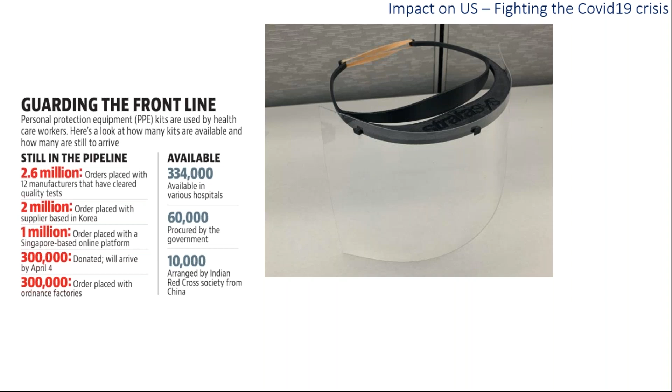Today, I think more than 200,000 such face shields are distributed across India, and the number in the world is almost uncountable. It's in the region of millions.

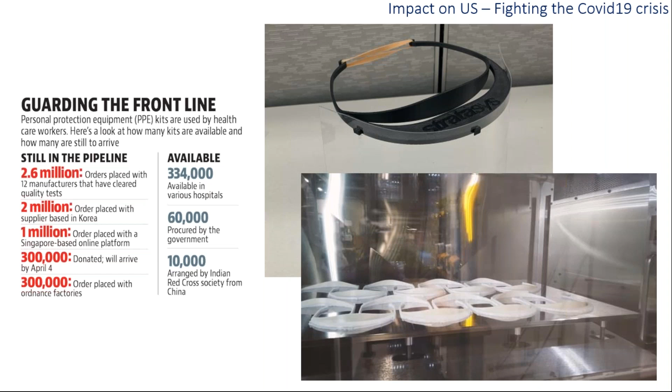The benefit that an industrial 3D printing technology brings to the table is reliability. Although we designed these parts so that even less industrial or less reliable 3D printers can produce fairly decent work, we were able to scale up to these quantities because the machines we predominantly use in the Stratasys network are robust and reliable.

It didn't take too much time for India to catch up. A lot of universities, colleges, companies, and people in general who have printers in India started producing everything from face shields to reusable masks. This is happening all across the country, northwest, southeast, where a lot of our customers, even the traditionally automotive and aerospace customers, have paused their automotive and aerospace activities and started helping the community produce masks, face shields, or ventilator splitters.

We took it a step ahead because we understood that even hundreds and thousands of 3D printers across the world will always have the challenge of only being able to produce a certain quantity of parts per day, and the cost per part is something we cannot reduce beyond a particular point. So we adapt, because we eventually need injection molding companies to give themselves time to prepare for injection molding so these can be produced in the millions of quantities needed.

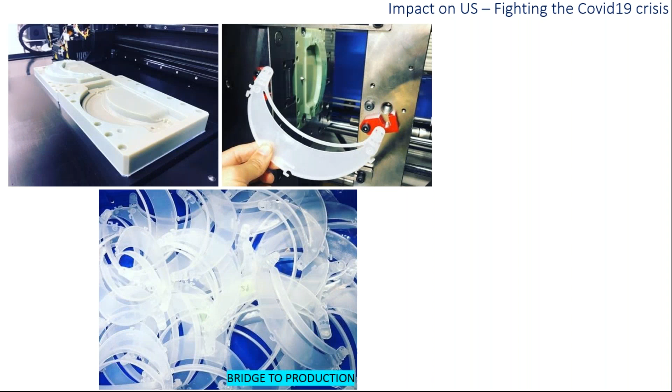We found that intermediate steps, like instead of producing the part with the printer, we can produce intermediate injection molding tools using some of our technology. Yes, these tools cannot produce the lakhs of parts that conventional metal injection molding tools can, but a few thousand numbers per day in a different manufacturing approach can be produced. So rather than having to produce 1,000 face shields, we started producing a few molds, and a few molds started giving us a few thousand face shields in a much more time and cost effective manner.

This is a concept that the industry, especially in automotive and aerospace, and to some extent in the medical world, has been using, called bridge to production. This is a stage between your rapid prototyping or very low manufacturing and mass manufacturing, where you bridge that number between a thousand to ten thousand, or a hundred to a thousand, depending upon the scale of the object, while you get your manufacturing setups or logistics ready.

Setups ready to produce your final parts in the quantities that you desire, and set up the supply chain to deliver it in the areas as quickly and as efficiently as possible.

Another thing that we realized is that countries in the world are and will continue to face a shortage of testing kits, the actual kits which determine whether a person is positive for coronavirus or not, because the manufacturing of this kit is controlled by a few major suppliers. Fortunately, those suppliers have opened up their design and manufacturing know-how to many people in the world.

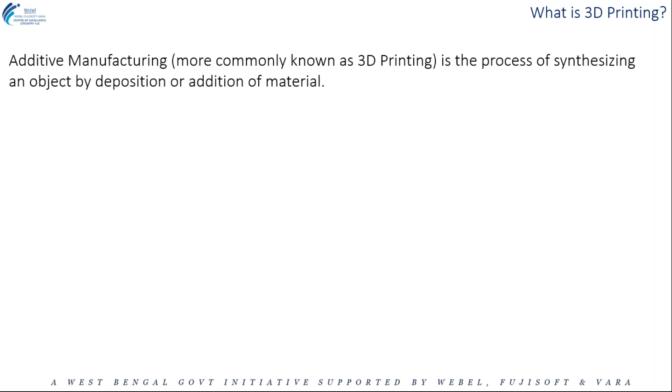The process works with your CAD file. You might have access to any design software in the world—it doesn't matter. 3D printing is one of the only processes in the world which just requires a CAD file and no other specialized tools or software. So you start with your CAD file, it could be anything.

What the printer software essentially does is split the CAD into a number of layers or cross sections. Imagine a piece of paper as a 2D layer or cross section—you stack a hundred or a thousand of them together and it becomes a 3D object. Once this is done, these layers are nothing but information telling the printer how to lay or deposit material on top of each other. That's essentially how 3D printing works.

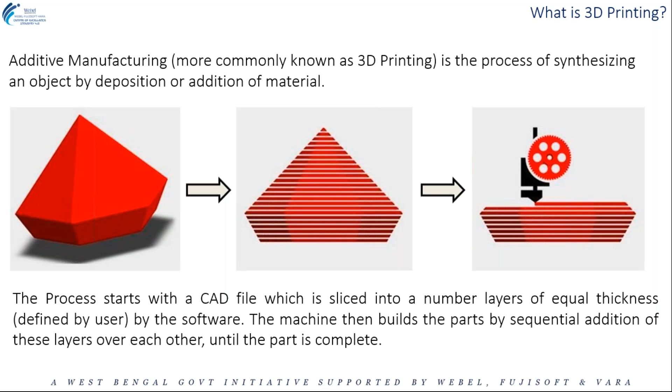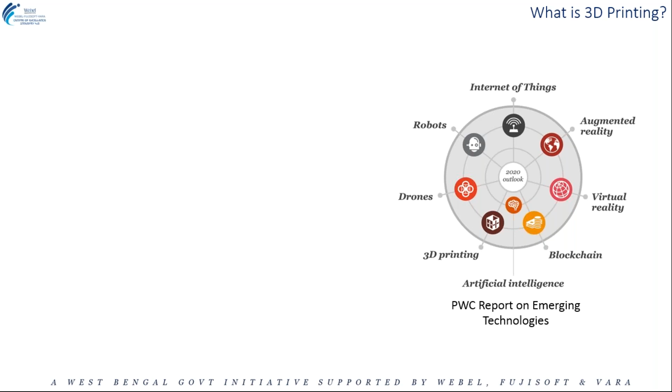I'm sure all of you have seen various videos on the internet and read articles defining the process. Now, the most beneficial thing about 3D printing is that it has proven to have the potential to act as a backbone to various other Industry 4.0 emerging technologies—whether robotics, drones, smart factories, or smart medical devices. 3D printing has proven to act as a backbone to most of these technologies.

One of the very fascinating things I like about 3D printing, which keeps me driven to work in this industry, is that it gives access to manufacturing to people who don't have the know-how, skill, or capacity to use traditional, even low volume, manufacturing processes. For example, I am an electrical engineering graduate by qualification.

For me, it is as easy to produce a part using a 3D printer for anything—let's say a robot or a drone that I'm building—as it is for a core mechanical engineering professional. So that's what this technology does: it makes manufacturing easy enough for anybody and everybody to adopt.

While for large corporations—the Marutis, the Hondas, the NASAs of the world—this may not be much of a benefit, for a small startup group of college friends who want to develop drones, or people primarily from software or electrical backgrounds with very limited manufacturing know-how, it is a very easy tool to validate their designs and products, giving them the luxury to fail a few times in order to perfect their products.

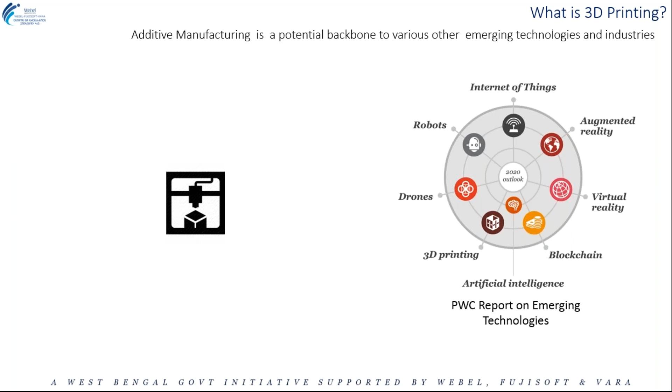Whether it be IoT and smart device manufacturers, smart factories, or drones, which is one of the most used applications of 3D printing both in industry and in education, drones can be mission specific yet generic enough. You build modular drones so you can use the same frame again and again, but keep changing the payload as per your requirement.

Medical devices, some amazing work has been done there, which I'll show you in some time. And of course, with respect to our more conventional industries like automotive and aerospace, which have been the early beneficiaries of 3D printing. I think, if I would relate correctly...

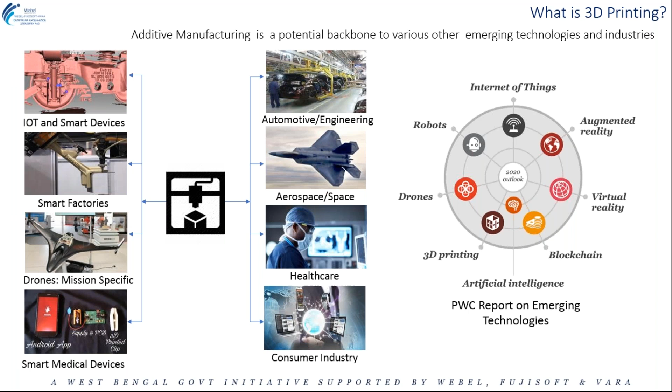The whole concept of bringing 3D printing was around the traditional industries of aerospace and automotive, because at the time the technology started, these were the only people able to afford it. But today, 3D printers and access to 3D printers have become much cheaper and more affordable. What we are seeing is that the healthcare, consumer goods, and small scale industries are taking over in terms of rate of growth as compared to the automotive and aerospace customers. Now, the industry is moving to 3D printing because of a few reasons.

What we feel is the most important reason why customers are moving to 3D printing, as I explained in the whole COVID-19 crisis, is that it gives freedom to people who are distributed, let's say companies working in America with facilities and branches in India.

Abhishek, something with your audio? Sorry, I think my connection dropped in the middle. I'm just going to restart quickly.

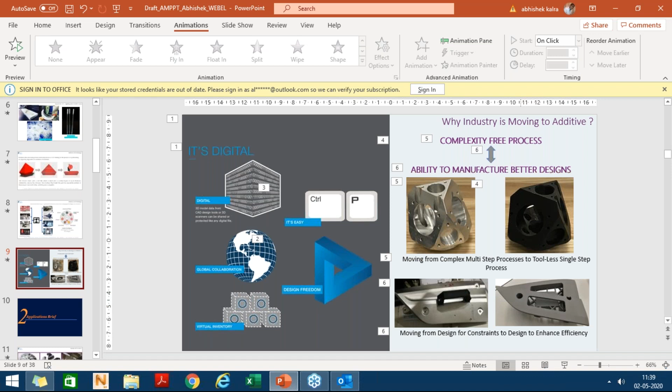Rather than storing, especially the older spare parts which may or may not be required in the future, we go to the concept of digital inventory. And most importantly, it gives design freedom, freedom to experiment with various designs, and freedom to explore designs and benefits and applications which have never been possible with traditional manufacturing.

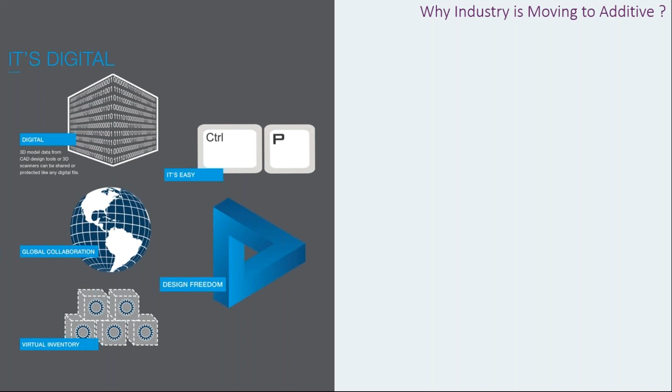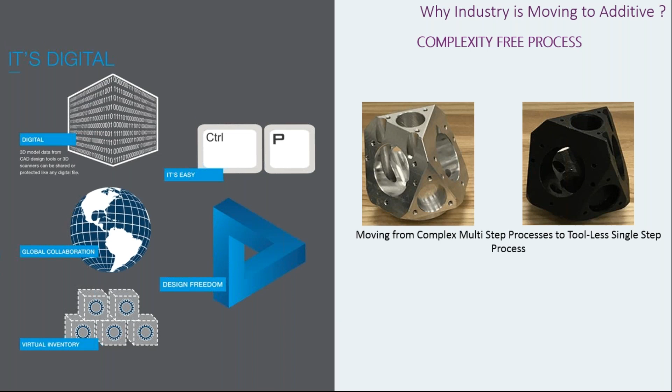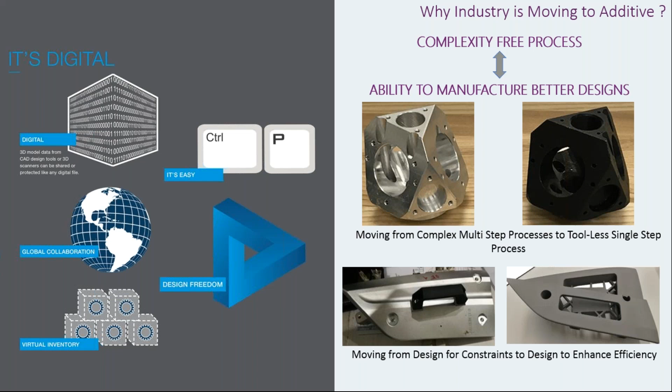Advantages of this: you can move from a complex, multi-step, multi-material, multi-tool process to a single-step, virtually tool-less process. And you can move from design for constraints, as you see in the left image, where you have to design parts so they can be manufactured using certain available manufacturing technologies, versus design for efficiency. This brings a lot of advantage to both traditional industries like automotive and aerospace, as well as to startups who will have very limited know-how of the manufacturing process.

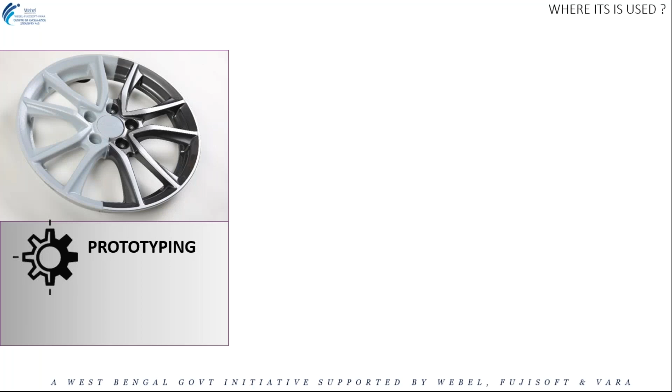If I have to split the application brief with respect to 3D printing, broadly the application can be classified into three categories. First is prototyping. Prototyping is essentially when you want to mass manufacture something - it could be a watch, a cell phone, or a car - with various systems integrating into each other, and you want to test your designs. So you build prototypes very quickly and cost effectively using 3D printing.

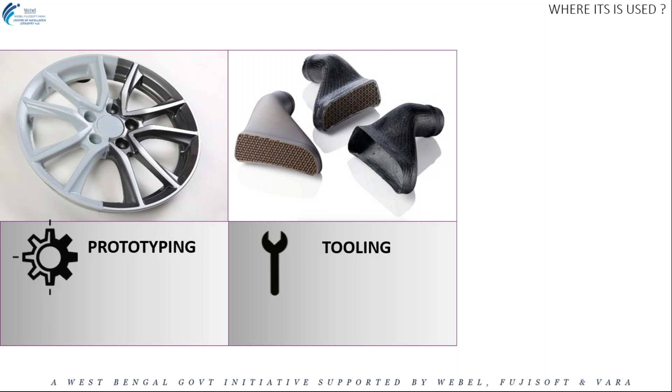Second is tooling. The example I gave you - rather than producing face shields, you produce injection mold tools and use those tools to produce face shields - is an example of tooling. And of course, manufacturing or end-use parts.

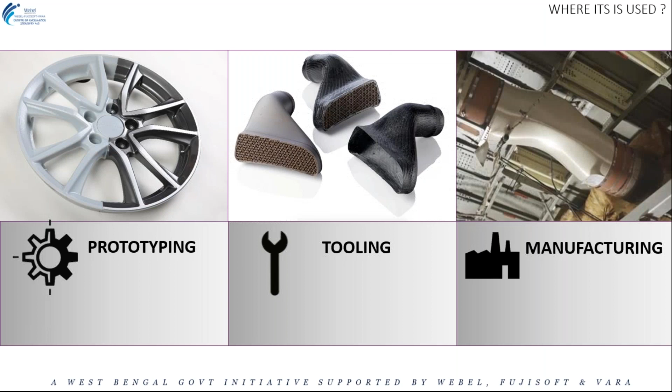Now, if I have to talk about the split, which is consistently changing, I think 50 to 70% of the work happening in the world today is around prototyping. The reason being that 3D printing is not a high volume game, it's a high value game. Though we are continuously enhancing and developing our technologies to compete with some traditional mass manufacturing technologies, we have some time to go until we achieve equivalent cost and time per part.

Next, we have tooling, which is roughly 10 to 20%, and manufacturing is probably less than 10%, which is still a big number if you look at it - manufacturing is a $13 trillion industry. What's happening and what we're seeing is that the trend of people buying and using 3D printers is consistently shifting from prototyping to tooling to manufacturing. In the next 5 years, we are going to see this percentage almost come to a 50-50 between prototyping and tooling and manufacturing combined.

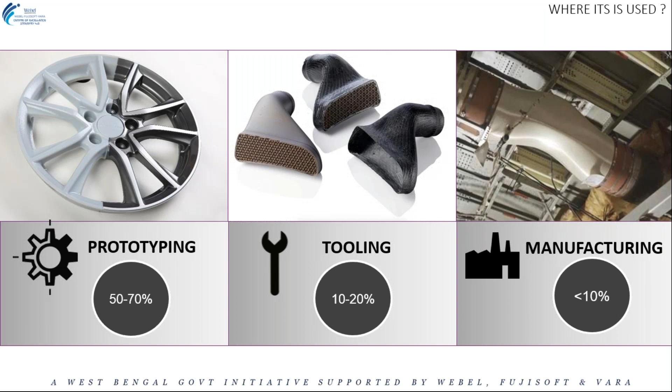As the technology grows, as the material grows, and most importantly, as the application understanding grows, typically even the concept of prototyping has changed from simple design validation, where you have a pen and its cap and you just produce the prototype to quickly check the form and fit of the part, to machines which are able to produce parts that are not only functionally realistic but also look realistic.

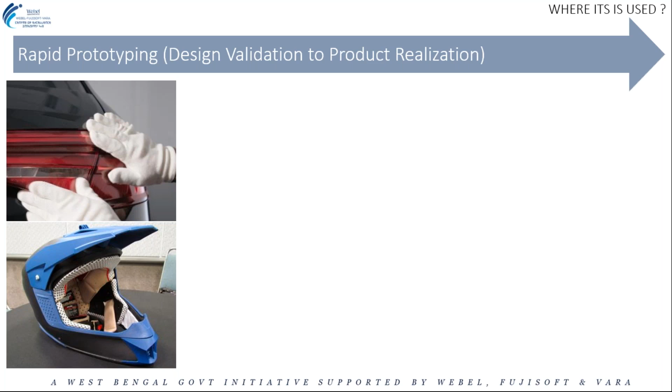So for example, the tail light cover that you see on your screen is a functional cum design prototype.

Rapid tooling has also extended itself into the factory floor, where a lot of lightweight tools like jigs, fixtures, and assembly aids are being built to ease the weight load on the workers, as well as to increase the line efficiency. And rapid manufacturing is growing from rapid manufacturing for customization.

So today, a lot of car companies like Daihatsu or Mini Cooper allow their customers to customize the exterior or the skin of the car, which is a mass customization example.

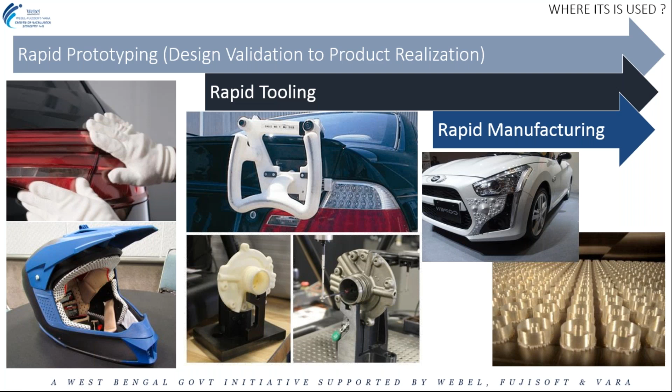To the other end of the spectrum, where a lot of aerospace and automotive companies—and the face shield example is one, extrapolated to the more consumer industry—it's being able to build low batches of parts without investing in heavy tooling.

Now, if I talk about technologies, there are various 3D printing technologies available in the world. At Webel, we have access to two of the world's most leading technologies, which are fused deposition modeling and PolyJet. So I'm going to talk about fused deposition modeling, or polymer AM.

When I talk about 3D printing technologies, beyond just these two, the technologies are primarily divided into two parts: technologies which allow you to build products for the functional and strength aspect, and on the other end of the spectrum, technologies that allow you to build products for the visual aesthetics and styling aspect.

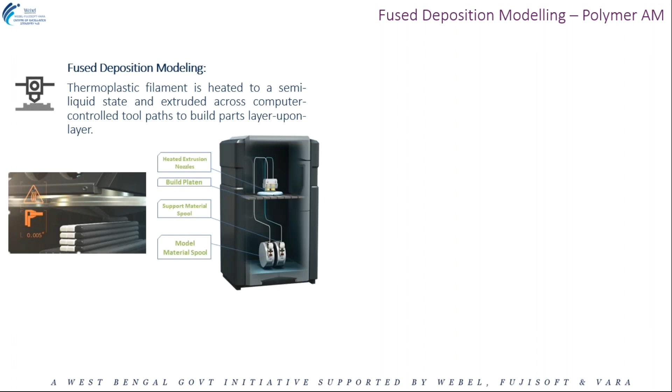So FDM is one of the technologies used for the strength and functional aspect, because this technology uses materials which are the same or similar to materials used in traditional manufacturing. So you have materials like nylon, polycarbonate, or ABS, which make it very easy for companies to install or use this technology and produce either prototypes or tools in the same or similar materials they use for traditional manufacturing, thus being able to define a very accurate link and analogy between the prototype and the end use part.

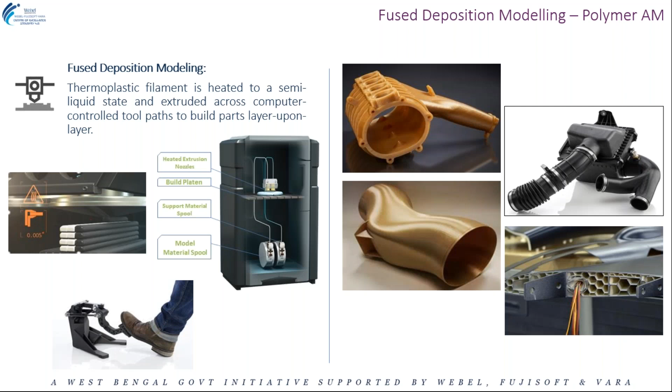We have close to 14 different types of materials in our FDM family. We have materials for general purpose prototyping, which is ABS and polycarbonate. We have elastomeric materials, which can be used for some very advanced functional testing. We have carbon fiber reinforced materials. And then we have some exotic materials which are approved for some very specific applications.

For example, we have materials approved by almost all major aerospace certification bodies to be used as parts on aircrafts and even spacecrafts. We have medical grade materials which can be used to produce medical devices, as well as go inside the body. So on and on, we have a very vast library of materials, and the whole benefit of using 3D printing is that you can combine the application strength of these materials, along with design for additive manufacturing principles, and build products which have never been possible in the past.

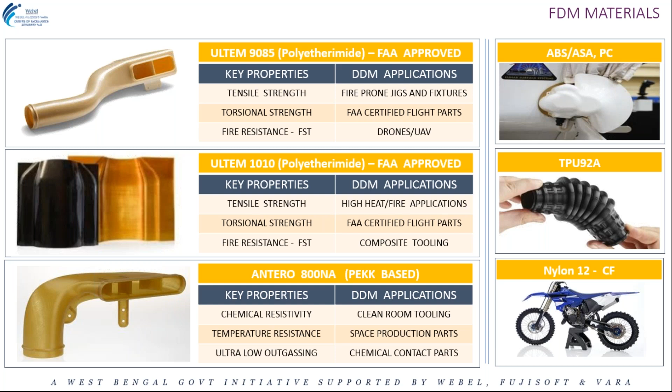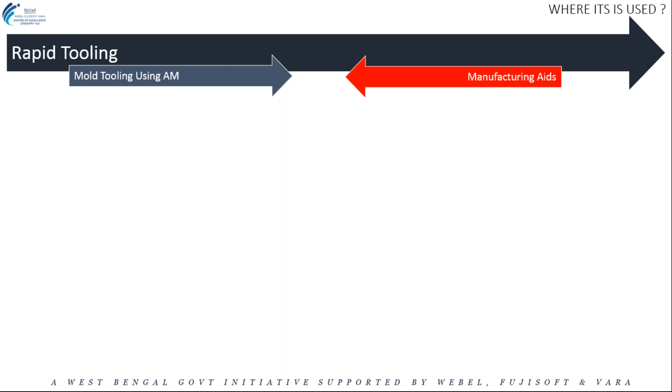So if I talk about FDM specifically, beyond prototyping, FDM—or 3D printing in general—has been used in the rapid tooling space. Rapid tooling I will divide into two parts: first is mold tooling, so the example I showed you on the face shield is a mold tooling example, and jigs and fixtures come into manufacturing aids.

So one of the questions I often get asked is that my industry primarily runs on metal, I produce metal parts—what will I do with a plastic printer, or why should I adopt plastic 3D printing? Now, while metal 3D printing technologies exist in the market today, they are very, very expensive, both from a capital point of view as well as from an operational point of view, and there are very few people in the world who can actually afford to run these kinds of technologies.

So there are methods we've been using, like sand casting and investment casting, for ages now. Why don't we combine 3D printing and traditional manufacturing methods to achieve what is not directly possible with 3D printing and what might be difficult with traditional manufacturing? For example, in this case, we've been able to produce master patterns using FDM printers.

Then use them in traditional investment casting or sand casting processes to produce metal parts. A lot of medium and small scale industries across India use this application very extensively, to produce everything from door handles to pumps to aerospace and automotive parts, acting as a bridge to production where you need those first 500 or 1,000 parts, too expensive to invest in tooling.

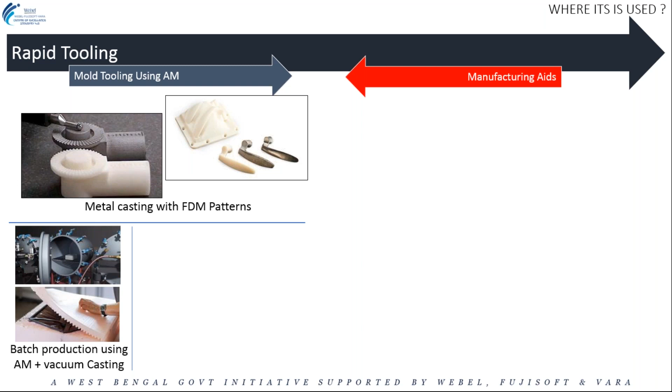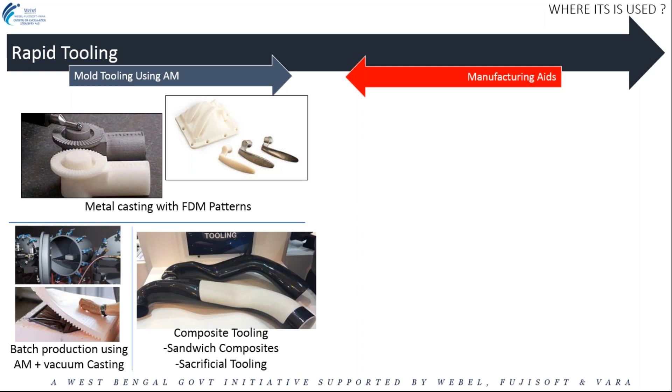And too expensive to produce with conventional methods. Similarly, another method is batch production in plastics using additive manufacturing to produce master patterns, then creating silicone mold tools to create end-use plastic parts using vacuum casting. An extension of this, which we call a flagship application, is composite tooling, primarily used in high performance industries. We have some amazing applications in composite tooling, but I won't go too deep into it now, maybe in another webinar sometime in the future we can discuss that specifically.

Now, metal is a heavy substance, and in a scenario where a worker has to lift a tool, operate it, and put it back into position, say once every 30 seconds or once a minute, the heavier the tool, the longer it takes to operate, reducing line efficiency. It also leads to adding more people to an operation because a tool can be too heavy for a person to operate alone, and can lead to repetitive motion injuries.

So a lot of companies in India and globally, whether Ford, Honda, Maruti or Ashok Leyland, have switched from metal tools to plastic tools. These tools are much more ergonomic and lightweight, thus increasing line efficiency and reducing the risk of health hazards on the line.

Various published examples include a tail light assembly tool, a windshield assembly tool, checking fixtures or gauges, and a lug nut starter tool for a car tire. A lot of these tools are being gradually converted from metal to plastic. What we use in both the mold tool concept and the manufacturing aid concept is a concept of hybrid manufacturing.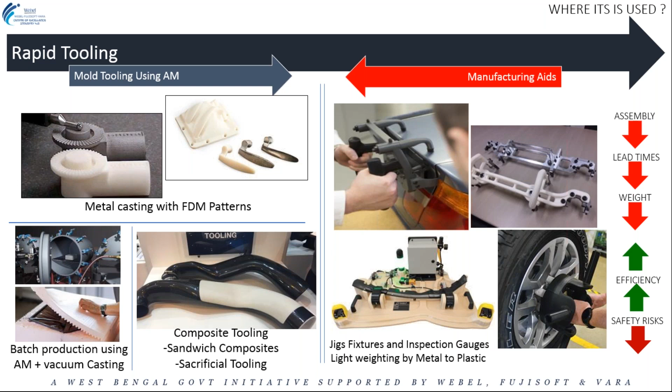Remember, the objective is to create a better product, whether only with 3D printing, only with conventional manufacturing, or a combination of both, depending on the requirement of the user and how much his requirement requires him to use which technology. This leads to reduction in assembly, reduction in lead time, reduction in weight, added efficiency, and reduction in safety risks.

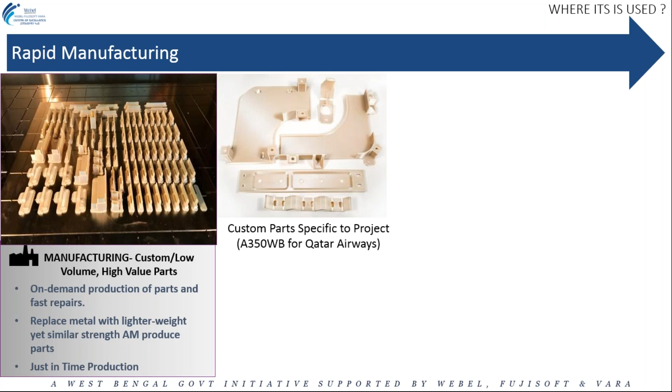Moving on, rapid manufacturing is one of the fastest growing applications of 3D printing, and the face shield and mask examples are very good examples of it. But just as a quick example, the whole concept of rapid manufacturing started with aerospace companies trying to produce low-volume aircraft parts, moved to automotive, especially the low volume automotive which is the railway industry, being used in India also by Siemens Mobility for repair and refurbishment operations.

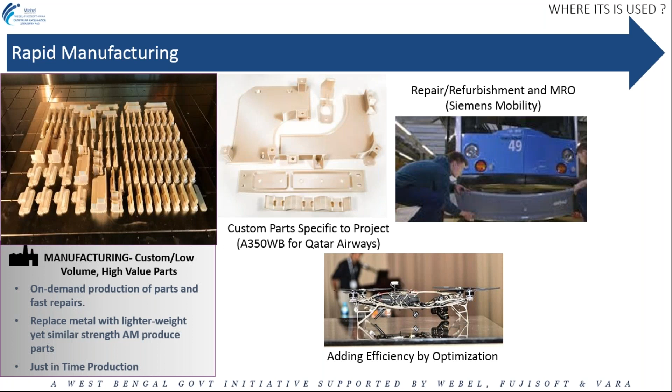And then of course adding topology optimization or CAD optimization to produce much more efficient parts. This brings, as I said earlier, concepts of just-in-time production, replacing metals with plastics for lightweighting and on-demand production. We're only going to see more of this growing in the future as costs come down and demand for customized products grows.

Some of the use cases I'll show from some of the Indian customers. Now, before I get into customer specific case studies, I'd like to show you some tip of the iceberg examples, which tell us the epitome of how this technology is being used in India and across the globe.

So in 2014, NASA managed to replace 30 parts that were traditionally manufactured with metal with polymer 3D printed parts on the exterior of a satellite. These parts are nothing but little antenna housings which have to keep the antenna in a certain orientation so that the signals can transmit correctly.

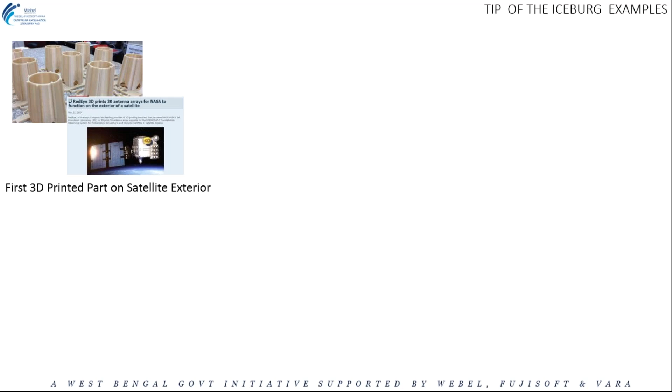Before this, before 2014, never had a 3D printed part gone inside a satellite - forget exterior of a satellite, which is essentially exposed to outer space, where the conditions are as unknown as it can be. The point being that if the correct material, the correct design principle, and the correct know-how is applied, 3D printing can be used to solve challenges which are unthinkable.

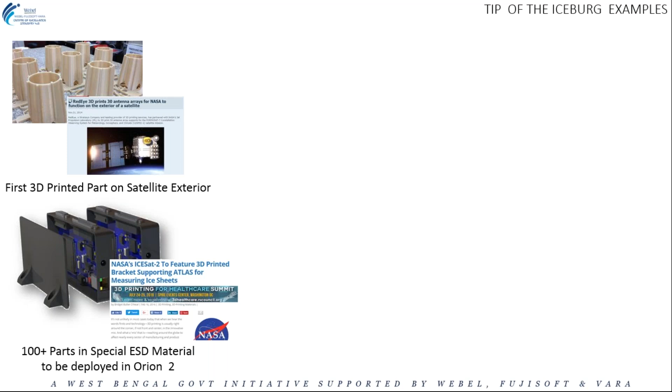Almost 100 plus parts are set to be deployed in Orion 2 - or has it already been deployed - which is an extension of the first project, where we have developed specialized material for the industry, which solves some of the post-processing or hybrid manufacturing challenges that NASA had with respect to launching the first part.

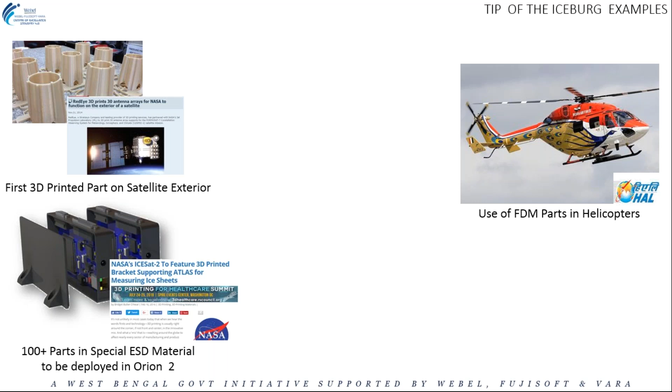Coming to India, entities like HAL or Center for Airborne Systems have been using 3D printing technologies of ours for years now, producing parts for prototyping, tooling, and manufacturing applications. And ISRO, said to be one of the world's most efficient space agencies, the pride of India, has launched many 3D printed parts which were conventionally metal or composite manufactured parts in their satellites.

And the number is increasing as satellites are being launched. Every satellite that India is launching today has 3D printed parts, which earlier used to be traditionally manufactured parts. Now I don't have an official number on this, but the number is in the hundreds.

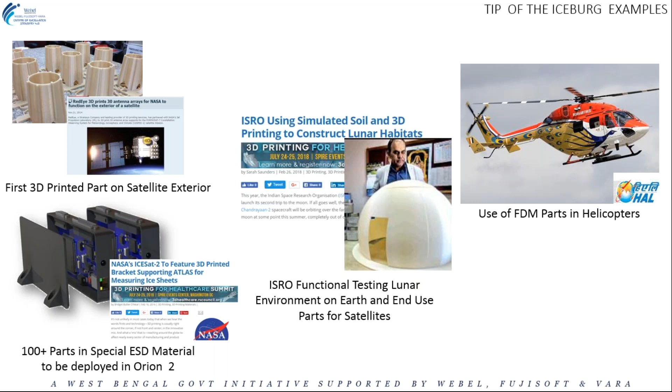So the point I'm trying to make is, one, that you can have an array of advanced, very high demand applications that can be executed with 3D printing if the correct design and material approach is used. And second, that contrary to popular belief, India is making a lot of progress with respect to 3D printing being used in these applications, as well as in the more consumer or generic applications. I'm going to show you some of those case studies.

Some of the applications that I'd like to show you are - and I'm going to quickly try and wind this up, and skip some slides because I think I am running a little bit out of time.

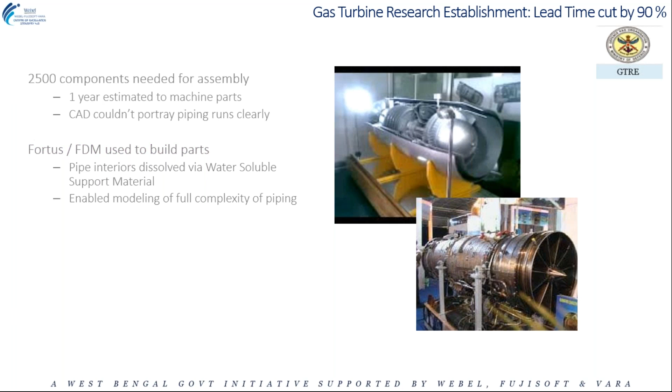So GTRE was one of the first adopters of 3D printing in India, back in 2008. They were able to create a full-scale 1:1 engine prototype for various projects and applications, and bring down the cost of prototyping from an estimated $60,000 at the time to $20,000, and most importantly, bring the lead time down from 12 months to about 6 weeks.

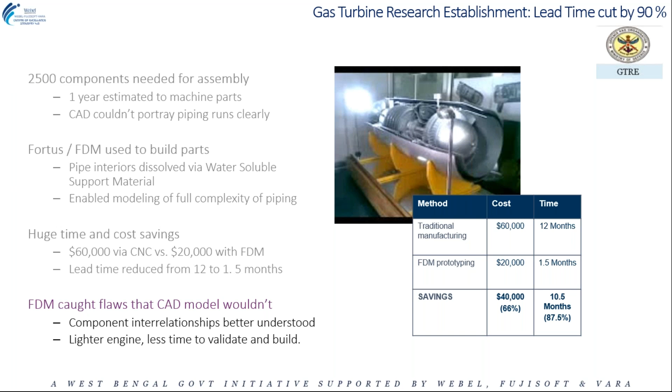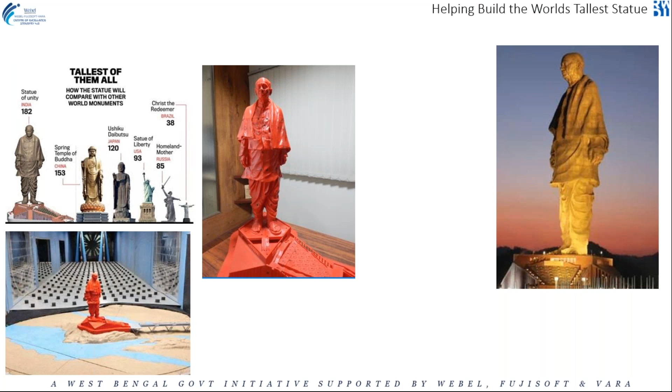Similarly, one of the most talked about accomplishments in the infrastructure space - RWDI, a Canadian company that does wind engineering - has used 3D printing technologies to build wind tunnel models to be able to do wind tunnel testing before the statue is actually deployed.

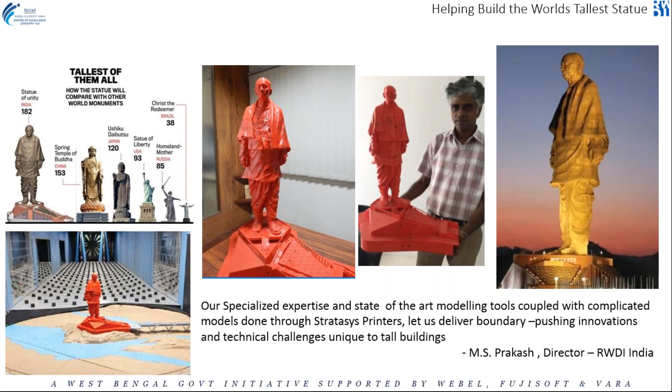So if you can see in this part, there are a lot of small sensors incorporated in the middle of the project. This 3D printed part combined with sensors is put into something called a wind tunnel. The wind loads are analyzed, and on the basis of that, a lot of decisions are taken with respect to the positioning, the materials, and the construction of the actual statue or high-rise building.

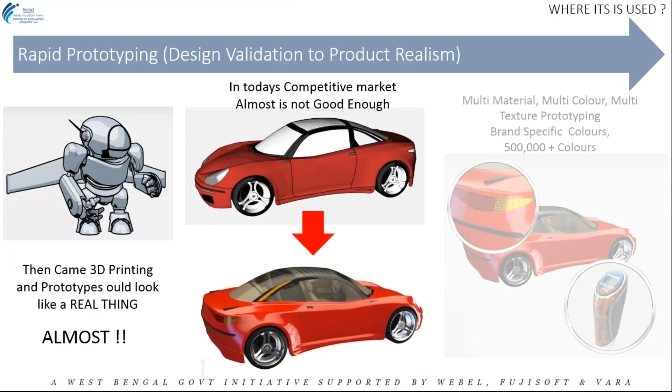And I'm going to skip a few slides and move to some of the medical applications, because I think we're running out of time and I have a lot to show.

Now I'm going to show only two case studies, one from the MSME sector and one from the medical sector, and then we'll move to the next part of the presentation.

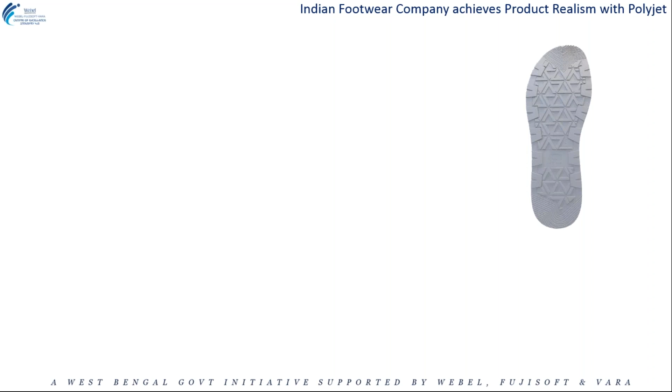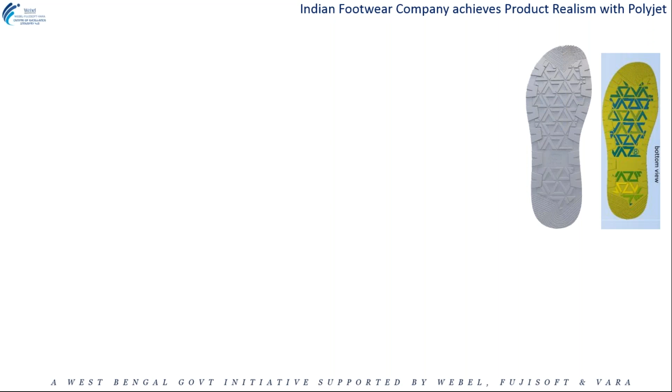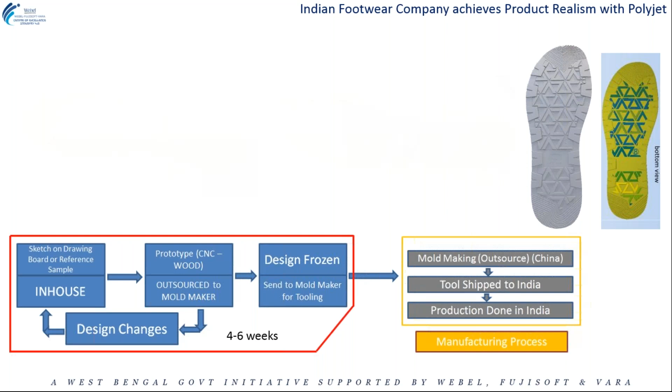This is of an Indian small-scale shoe manufacturer who wanted to incorporate both functional and visual aspects of his design in the same prototype. We were able to incorporate the colors they wanted to use in their traditional final product, as well as with a rubber-like material, reducing a 6-week sampling lead time - which used to involve sending to China, coming back to India, design revisions happening, and so on - to a less than a week process. We integrated various colors along with having it in a material that can actually be used in a shoe sole.

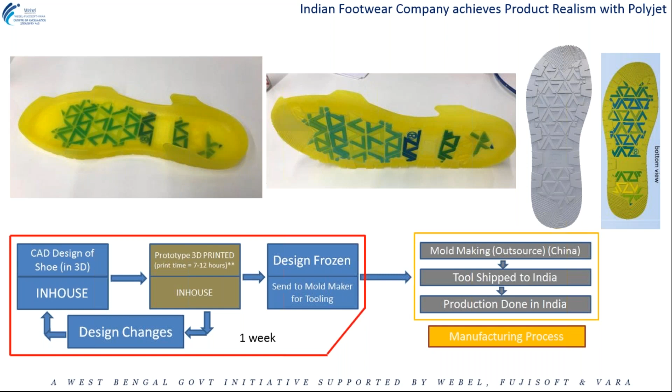An extension of this is that we did some tooling activity with the same customer, where we were able to produce a tool to create the first 50 parts. This is a very good example that I can share later with everybody.

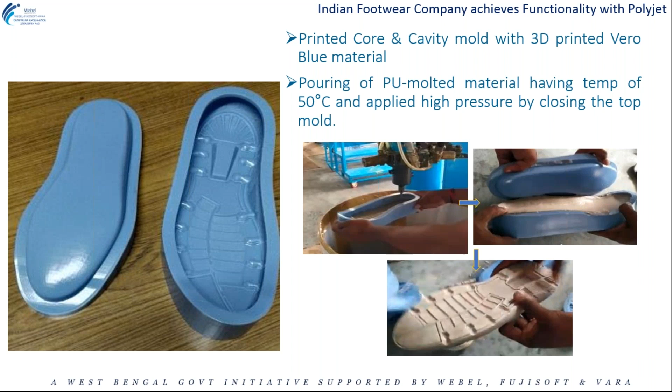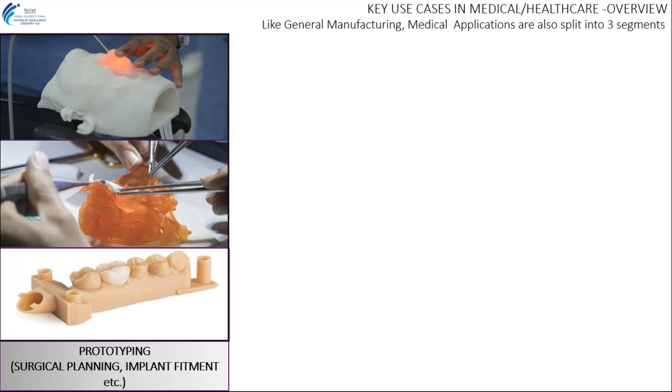Now I'll show you some examples in the healthcare space. We can use it for surgical planning, for surgical guides - whether dental surgical guides or surgical guides for implants - and for end use parts.

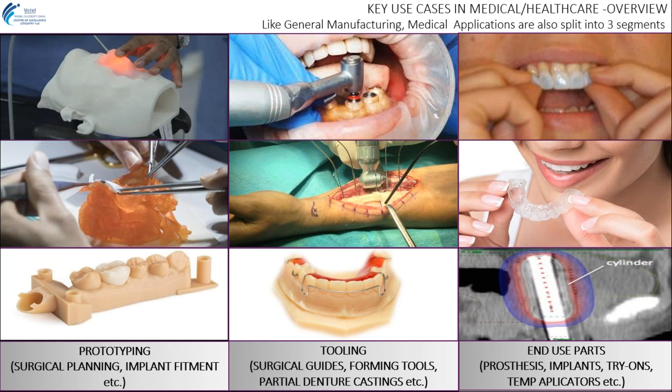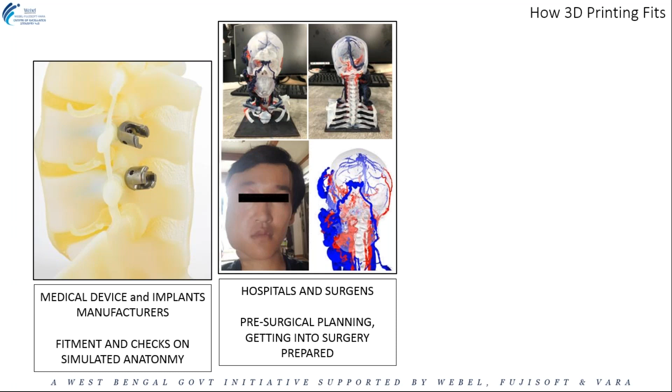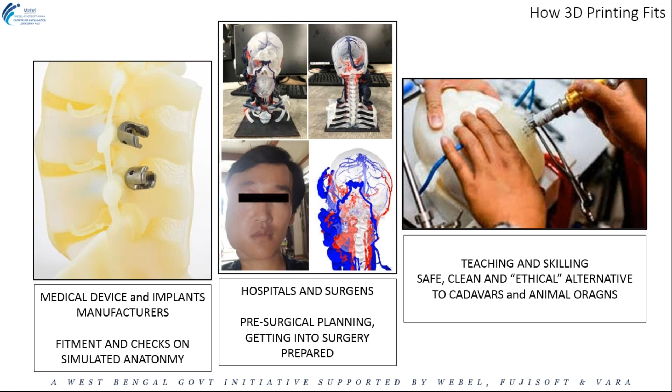3D printing allows medical device manufacturers and implant makers to do fitment tests traditionally done on cadavers, to simulate the anatomy. It can be used for hospitals and surgeons to do surgical planning. In fact, when the coronavirus crisis broke, we printed a lot of models showing the impact of coronavirus on the lung. It can also be used for surgical teaching, which is becoming one of the most important parts of adoption of PolyJet technology, or multi-material multicolor technology, in the world of 3D printing.

Three examples we have done in India are from cardiac surgery, urology, and lung surgery. In each of these cases, we were able to produce the anatomy both physically and representing different parts of the anatomy in different colors and materials.

We have materials proven to behave the same way as an actual organ would. So if a surgeon cuts onto skin that we've produced with a 3D printer, he will get the same kind of feedback.

We have close to 100 projects we have executed in the past year between cardiac surgery, urology, lung surgery, and many more, including orthopedics, where the common goal has been to reduce the surgery time and reduce blood loss.

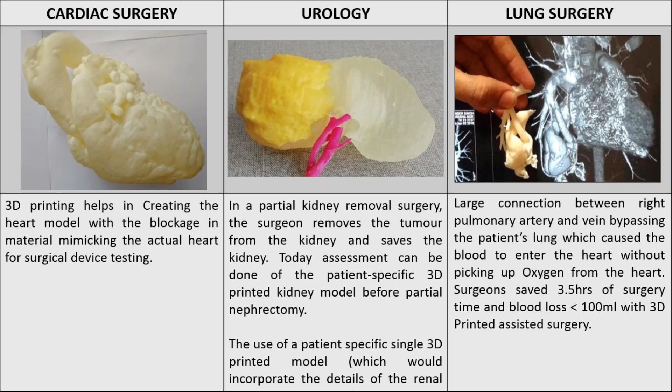Medical applications like this enable doctors to perform surgeries in a much more efficient manner, so that the risk of surgeries - especially complex surgeries, such as for small babies or pediatric surgeries - can be very well executed if the surgeon is well prepared by use of 3D printing models.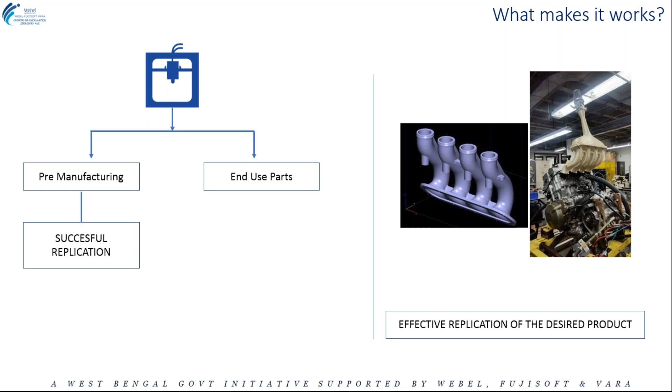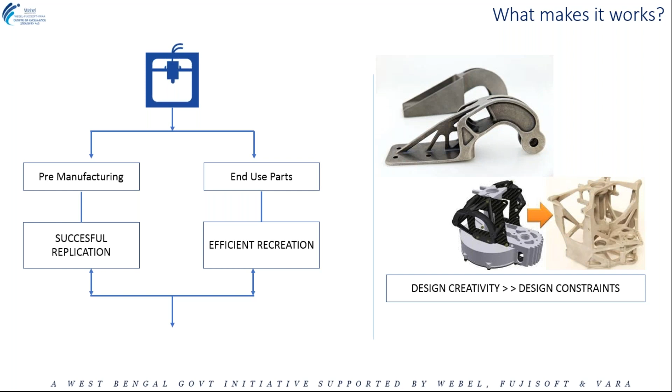So just to summarize, what makes it work is that when you use 3D printing as a pre-manufacturing setup, you need a tool that can give you an effective replication of the desired product. Whereas when you use it for end-use parts, you want your design creativity and design for efficiency to overtake the constraints of traditional manufacturing, and thus you get a successful adoption.

Now, just quickly before I wind up, I'd like to tell you a little bit about our COE. In Calcutta, we have set up a very large setup for additive manufacturing, perhaps one of the unique ones in the country, to be used both as a training center as well as for industries to come and use our network of manufacturing.

We have 7 printers distributed between FDM and PolyJet, and close to 30 plus materials that we can support you with. And we help you with not just producing parts, but application development, marketing support, consultancy, and advisory. Along with that, we also have design, 3D scanning, reverse engineering facilities, and cybersecurity, data science, and embedded IoT lab. So on and all, we have facilities both from a hardware point of view as well as from a knowledge point of view, to be able to support students, startups, as well as the industry of any kind in West Bengal, and of course extended to the whole country, to come and use our facility. And you can connect with the representatives of WEBEL.

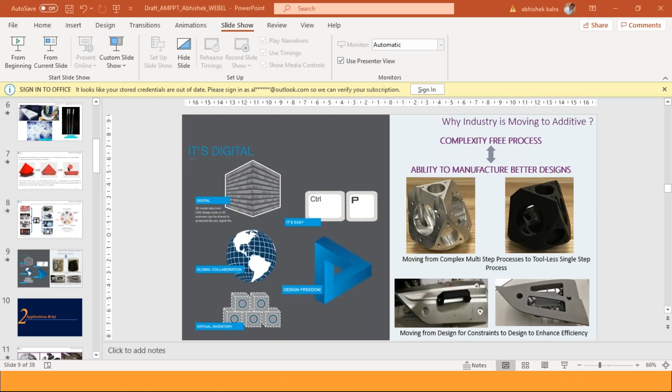Right, thank you, Abhishek. Now we have Mr. Mohit Kumar. He is the senior research scientist of Auxein Medical, an Indian multinational implant manufacturer and distributor of orthopedic implants with more than 1000 implant types distributed in almost 70 countries and more. In fact, they are the ones who have manufactured India's first 3D printed maxillofacial implant.

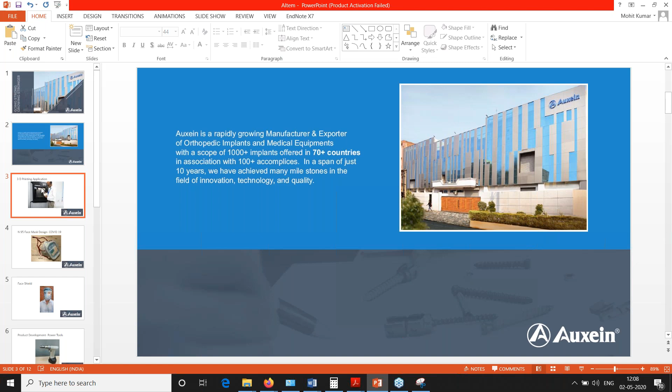Before 2 years ago, we bought an FDM based 3D printer in our company. We bought a Stratasys F170 printer.

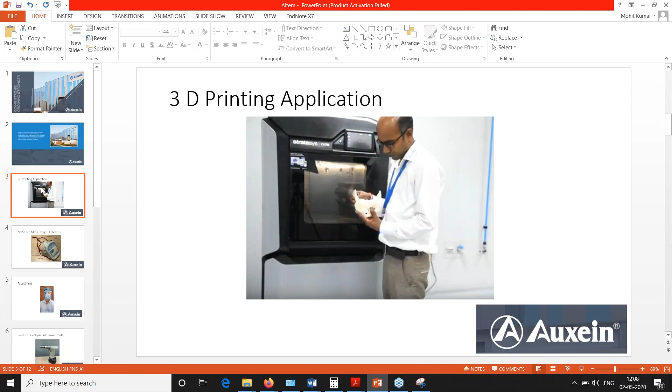So we have another project in the pipeline. This is the power tool, basically used in the drilling of bones. You can see this part, it is 3D printed in our FDM based 3D printer. Due to the lack of resources, we were not able to do the injection molding, so we just did the 3D printing and used this part as a functional part. We have used this power tool for the last 7 days, and it is working well as a functional part. So this was really amazing.

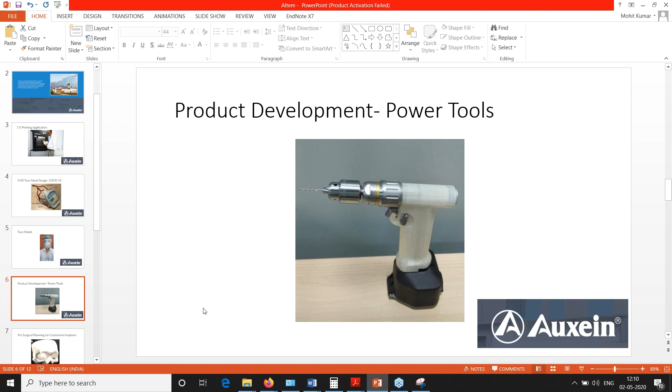And apart from this, we are doing the pre-surgical planning for the customized implant. Because metal 3D printing is a very costly process, we need to check the fitting of the customized implant. We need to show this fitting to the doctors and get approval from them.

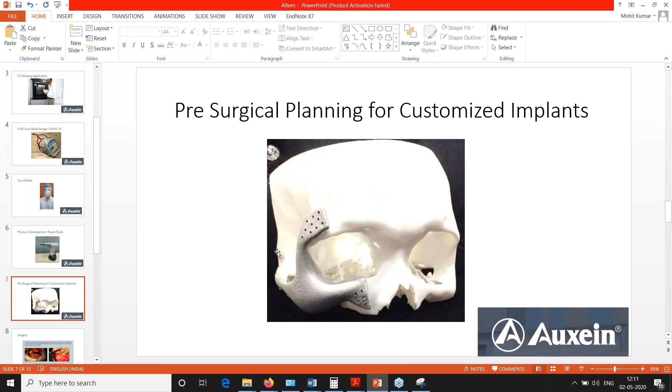So we do the 3D printing of this customized implant, then we do the 3D printing of this facial bone, and then we need to get approval from the doctor. So we are using our printer for the pre-surgical planning also. This is the same implant that doctors have implanted in the patient. Now the patient is, I think, more than two years out, and there is no problem with this implant.

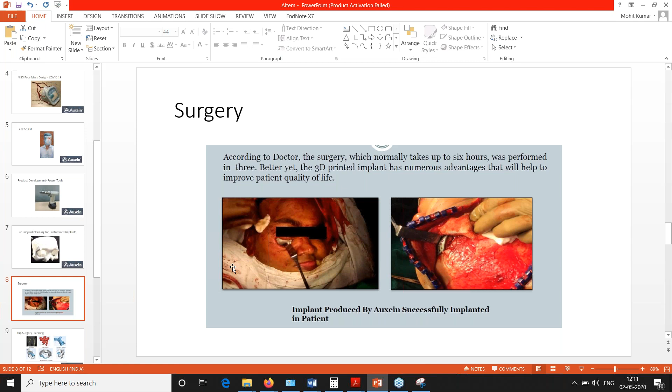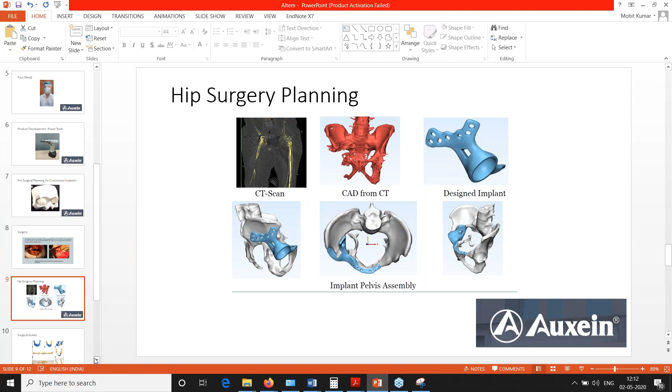Apart from this, we are also doing hip joint replacements. Basically the process is the same for this. We segment the CT scan data and develop a CAD model. After developing the CAD model, we design the implants and get them 3D printed in plastic. We show this to doctors and get approval from them. After the approval from the doctors, it gets printed in metal, and after that it is implanted into the patient's body. So here is another application: surgical guides.

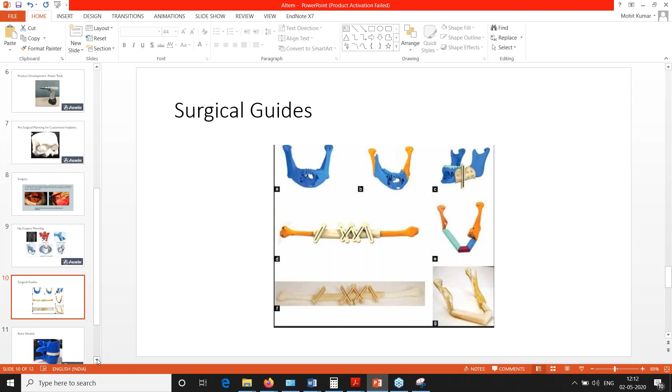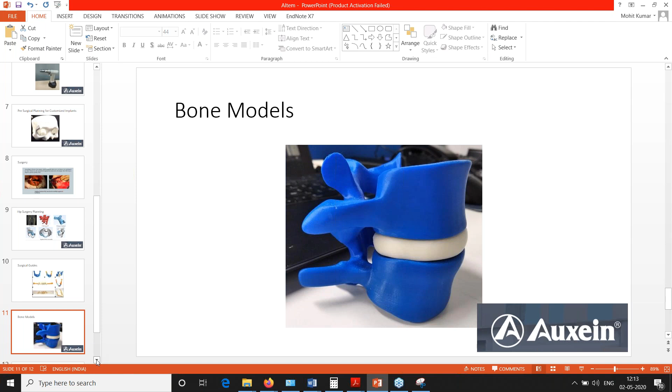So, thank you. These were the applications of the Stratasys FDM printer that we are utilizing in our company.